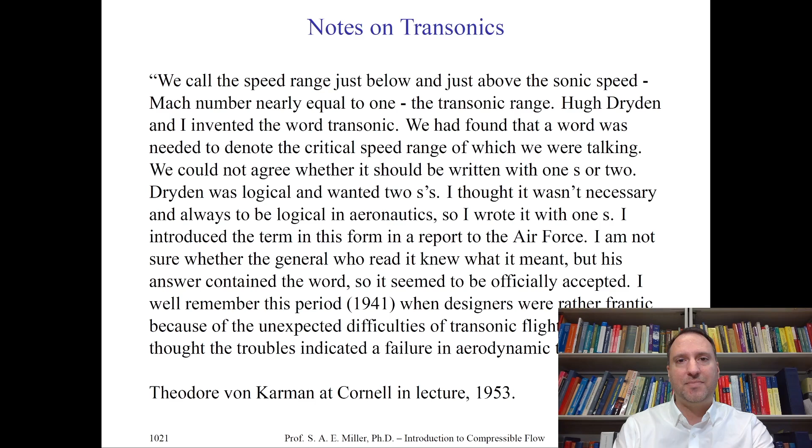Let's start with a fun quote from none other than Dr. Theodor von Karman in his Cornell lecture in 1953. We'll read this together. Dr. Karman wrote and lectured, "We call the speed range just below and just above the sonic speed, Mach number nearly equal to 1, the transonic range."

"Dr. Hugh Dryden and I invented the word transonic. We had found that a word was needed to denote the critical speed range of which we were talking. We could not agree whether it should be written with one or two S's. Dryden was logical and wanted two S's. I thought it wasn't necessary, and always wanted to be logical in aeronautics, so I wrote it with one S."

"I introduced the term in this form in a report to the Air Force. I am not sure whether the general who read it knew what it meant, but his answer contained the word, so it seemed to be officially accepted. I well remember this period, 1941, when designers were rather frantic because of the unexpected difficulties of transonic flight. They thought the troubles indicated a failure in aerodynamic theory."

Indeed, this is where the origin of transonics came from, in a letter to the United States Air Force and its response. The argument, perhaps, between Dryden and Karman was resolved by the acceptance in the community of the new word they coined: transonics. Perhaps it means the transition between subsonic and supersonic flows. This is very important in this time period, of course, because of the advent of supersonic flight and trying to break the so-called sound barrier, to go faster than the speed of sound with a vehicle.

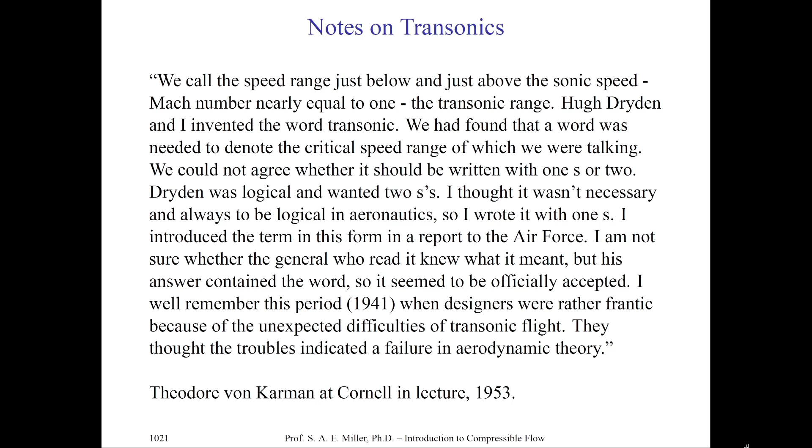Now let's look at some particular notes of transonics. Indeed, transonics might be characterized a few different ways. First, it could be characterized by the so-called drag divergence phenomena. This is where a rapid shift of center of pressure, an unsteady and somewhat unpredictable effect of shock waves on control surfaces, occurs. Indeed, in this class you'll have seen, back in the very beginning, many different Schlieren images of transonic flow and how normal shock waves move around the surface quickly in this transonic regime, making aerodynamic phenomena very difficult to examine and understand.

In this class, we'll also look at the so-called drag divergence phenomena, where the drag rises like a barrier as the vehicle moves towards the speed of sound.

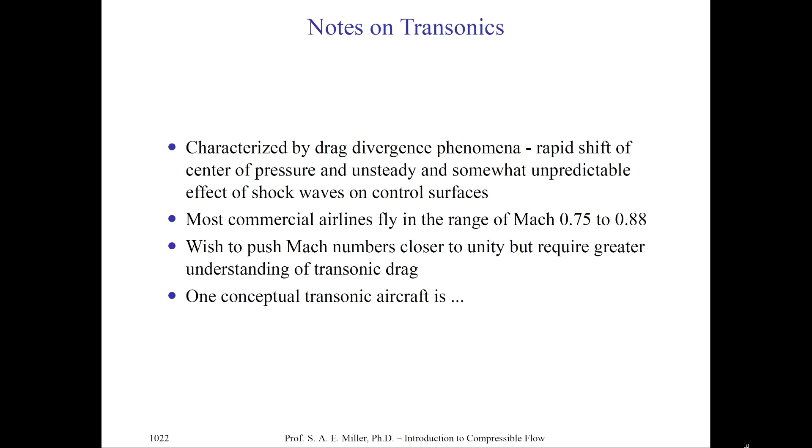Indeed, even today, most commercial airliners fly in the range of Mach 0.75 to 0.88, which is indeed the transonic range, because there are normal shocks forming on the vehicle, as we've shown in previous pictures in this class. Now, we might want to push the Mach numbers closer to unity, but that will require a greater understanding of transonic drag. Perhaps today we are still deriving, showing, and creating test vehicles that operate in the true transonic range, closer to Mach 1, rather than the low transonic speed range, say Mach 0.75 to 0.88.

Here's one perhaps conceptual artwork photo of what might be a transonic aircraft. This is a conceptual photo from the Boeing company. You can see it has canards and very interesting integrated engines with the wings. This whole vehicle is designed to have low drag and fly near Mach 1. The advantage of this type of vehicle is, of course, you can go a little bit faster without much more fuel gain, or loss in this case, as the aircraft might be a little bit faster than contemporary commercial tube and wing aircraft today. It has a unique design.

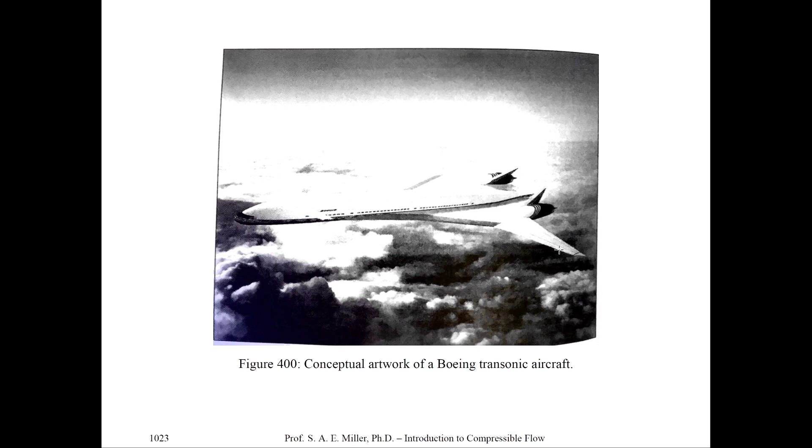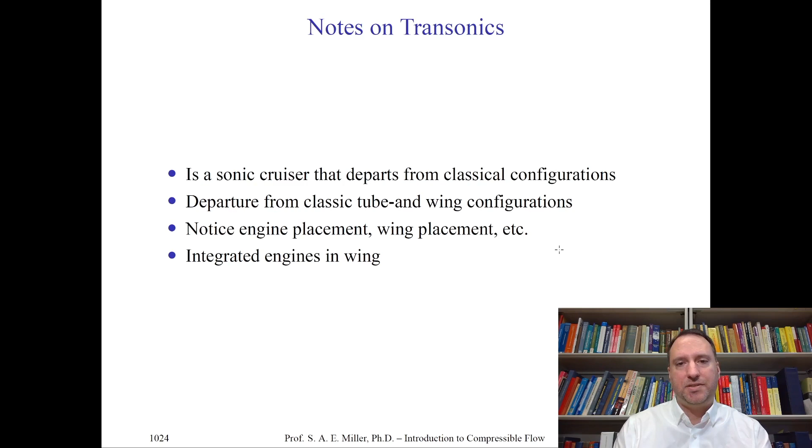Let's consider more about transonic flow. This Boeing aircraft is a so-called sonic cruiser, in that it departs from classical tube and wing configurations. You'll notice the engine placement, wing placement, etc., and the integrated engines on the wing.

Now, if we go back to the 1940s, you'll see that there indeed was a serious lack of aerodynamic data in the literature, wind tunnels, and theory in the transonic range. That's because there are very large changes of all aerodynamic variables near the transonic condition, which change rapidly and cause extreme difficulty in particular measurements. In fact, measuring transonic flow is very difficult because of all the normal shock waves that appear in the tunnels.

According to subsonic and supersonic linear theory of pressure coefficients and their corrections for slender bodies, we might find a pressure coefficient—in equations 663 and 664 of this deck—given by equations of Cp divided by the square root of 1 minus Mach number squared, and Mach number squared minus 1, respectively.

Of course, the Mach numbers just switch so that we have a real value and don't have an imaginary value, e.g. square root of -1 in the denominator. This might be viewed as an off-design parameter, away from, say, the transonic condition. As M infinity approaches 1 from above or below the transonic point, we find a particular singularity, and Cp

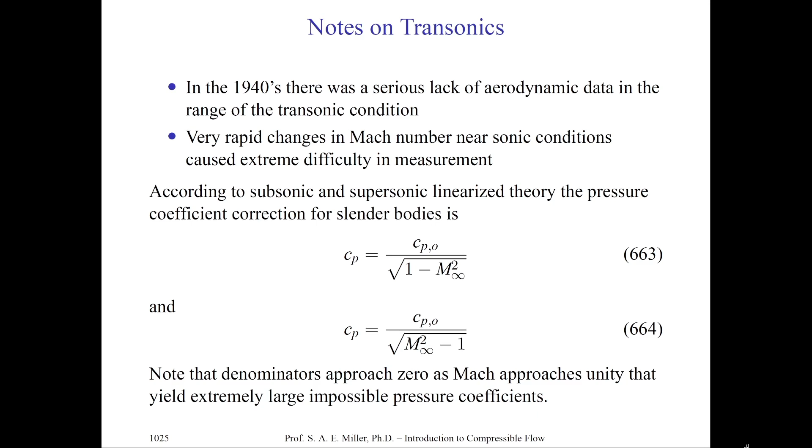blows up according to slender theory. So this theory isn't very useful. You can see that, indeed, as the denominator approaches 0, the Mach number approaches unity, and this creates impossible large values for Cp. But indeed, we do see large value increases of Cp on actual measurements. This is, of course, part of the idea of the rise of drag as we approach the so-called sound barrier. Thus, you can see the transonic regime is extremely sensitive to Mach number.

We can indeed today use the invention of slotted throat wind tunnels, that is, where a test section has holes in it, to help alleviate transonic measurements. If our wind tunnel test section has holes or slots in it, then this helps reduce the reflection of shock waves in the transonic flow. This is obviously very advantageous.

Today, CFD has helped tremendously in predicting transonic flows. It's an essential tool because it's so hard to do the work analytically or experimentally. Also, transonic flow is a challenge to modern engineers even today in the contemporary era, who examine both commercial flight and contemporary fighter aircraft that operate at low and high transonic speeds.

Why might this be? Also, transonic flow is important for space applications during ascent and descent, which all vehicles go through as they go to orbit. So for those interested in space, transonics is an essential subject.

Let's make some basic observations of transonic flow. First, let's make a definition. We'll introduce the critical Mach number, M sub cr. The critical Mach number is the free stream Mach number at which sonic flow is first obtained in a body. Therefore, M equals some subsonic value where transonic flow is first obtained. Thus, in the transonic regime, we could be viewing this as when, with MCR, the critical Mach number is indeed reached.

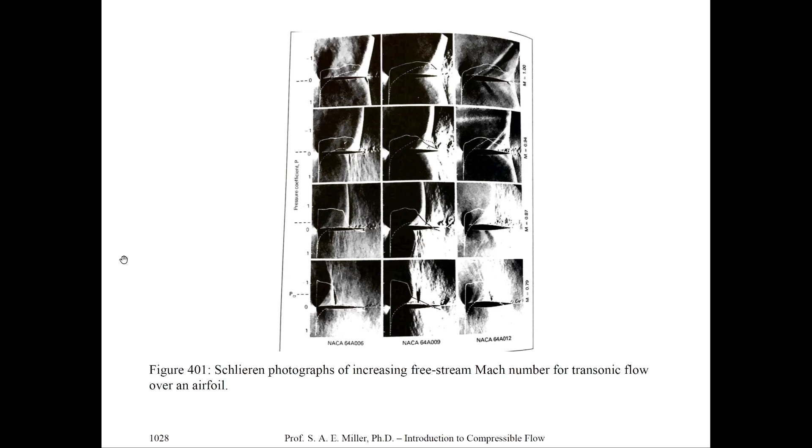We have superimposed a little coefficient of pressure as the white line on all these figures from the original NACA report. Take a few minutes and see how coefficient of pressure changes with the flight Mach number and thickness. What trends do you see?

Let's make some observations about the previous figure. First, you can see that the flow separation is caused by a shock wave boundary layer interaction, where the normal shock wave on the wing interacts with the turbulence and it creates a separation.

That is, the flow separates from the airfoil and recirculation occurs on the airfoil, which is of course not very good for lift. The pressure will increase across the shock wave, which we have learned previously, and it represents a very strong adverse pressure gradient, which helps cause flow separation. We indeed know that regular turbulent boundary layers, which we previously looked at in this class, when a surface has an adverse pressure gradient, might separate.

When a shock wave is near the surface, the boundary layer encounters an adverse pressure gradient and will almost always separate because of the normal shock interaction. The shock boundary layer interactions always cause very large rises in drag, and this could be called the drag divergence phenomena, which is always associated with transonic flow.

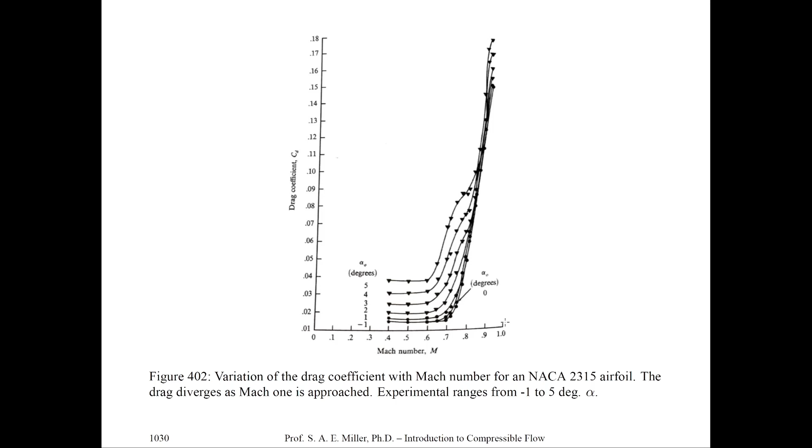Now let's perform some analysis of this flow. We'll do this through the Euler equations. This is an inviscid theory which consists basically of the Navier-Stokes equations with the viscosity set to 0. We'll assume that the flow is inviscid, it's adiabatic, and there are no body forces.

We'll also assume that the flow has large entropy losses and that the flow is rotational according to Crocco's theorem, which we haven't reviewed in this class, but you'll have to take my word for it for now, or you can look it up online.

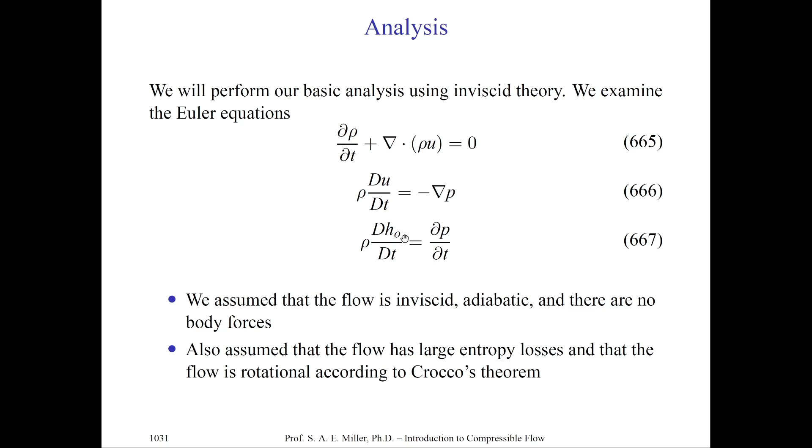The first equation is conservation of mass, the second is momentum, and the third is an energy equation written in terms of total enthalpy. Let's look at this particular flow and analysis.

Indeed, we also must account for entropy changes across the shock. We previously developed this relation. Also recall that Cp equals gamma r over gamma minus 1, which you learned from traditional thermodynamics theory.

Then the entropy across the shock wave might be written as equation 668 in terms of Mach number, because we know the pressure and temperature relations across the shock. This entropy rise across the shock might be written as delta S, the entropy change divided by the gas constant, which goes as two natural logarithms with respect to Mach number and gamma, where m1 is the Mach number in front of a normal shock.

We'll make a substitution. We'll let little m equal m1 squared minus 1. And the term in the second brackets will be equal to, upon substitution in 668, 1 over m plus 1 times the quantity gamma minus 1 over gamma plus 1, times m plus 1.

Now for transonic flows, we know that m1 is approximately 1, and therefore m is much less than 1. Therefore each log term is of the form 1 plus epsilon, where epsilon is much less than 1, because m1 is just above 1. We performed a similar asymptotic analysis when we studied normal shock waves, and we're really doing the same thing here.

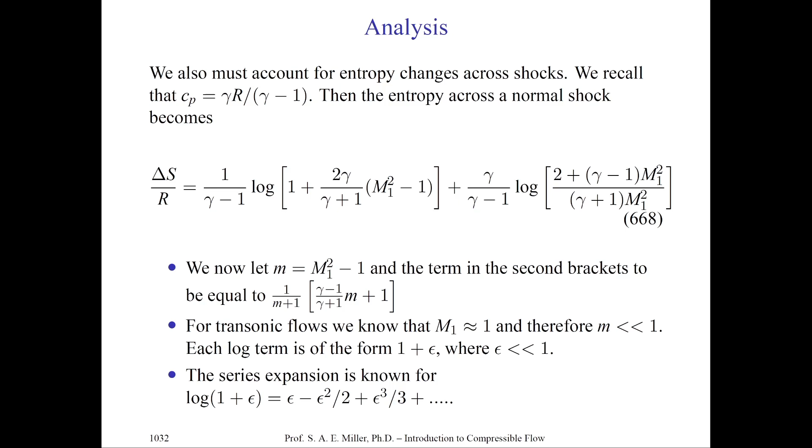We can also note that in our new form, the logarithm of 1 plus epsilon will go as epsilon minus epsilon squared over 2 plus epsilon cubed divided by 3, plus higher order terms. Since epsilon is very, very small, we should expect that log of 1 plus epsilon will go as epsilon. Using these definitions, we can simplify our entire equation 668 of the slide deck into 669 of the slide deck.

We'll have delta S, the entropy after and before the shock, the difference, divided by the gas constant, will go as 2 gamma over 3 times gamma plus 1 squared, times m1 squared minus 1 cubed. Indeed, this will show that the entropy increases across a shock and will be of the third order of m1 squared minus 1, indicated by this cube. This is an obvious analysis.

Then m1 squared minus 1 will be much, much less than 1 because m1 is approximately just above 1, according to our assumed analysis of 1 plus epsilon. Therefore, you can see upon substitution that the entropy increases across the normal shocks attached to a transonic flow of a slender body are very, very small, and so there's very little entropy gain.

The strengths of the shocks will then be given by our previous analysis of delta P over P, the pressure rise across the shock divided by the static pressure in front of the shock. It's proportional to M1 squared minus 1. You can see this from the pressure rise equation with Mach number for standing normal shocks.

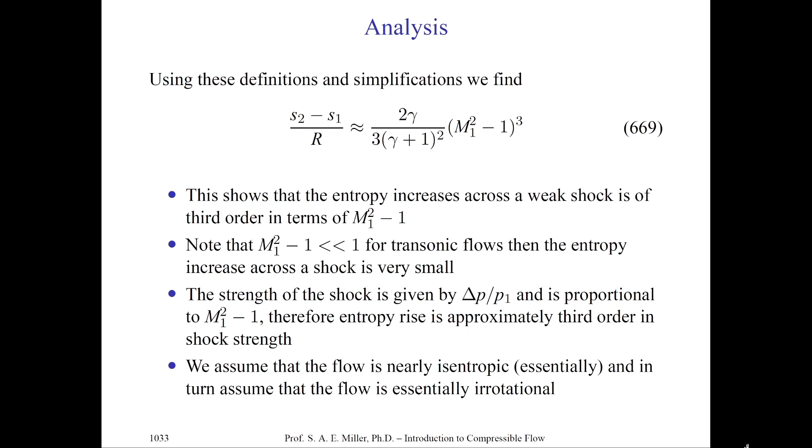We can then, in turn, from this analysis, assume that the flow is essentially irrotational. Not truly irrotational, but essentially.

With the Euler equations and this analysis, we can infer that the velocity potential compressible Euler equations can be written in the form of equation 670. This is a very important equation. Let's look at it: capital Phi is of course the velocity potential, which we can use to recover the velocities of the flow.

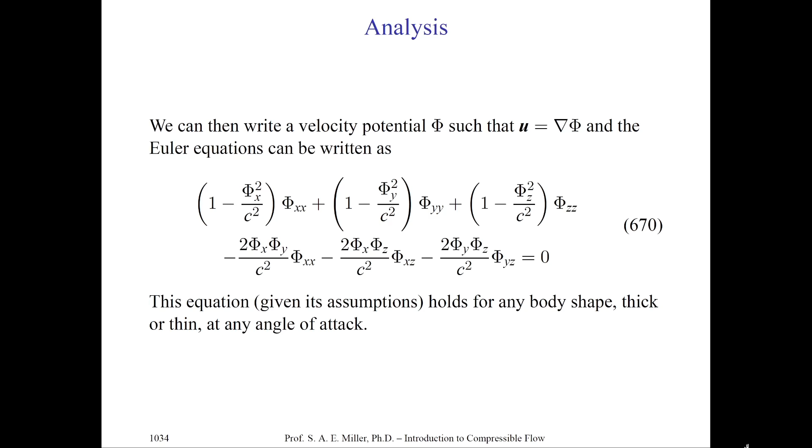Here c is the local speed of sound. The subscripts yy, xx, zz, and mixed derivatives are all partial derivatives acting on phi, first, second order, and mixed respectively. This equation, with our assumptions, should hold for any body, thick or thin, at any particular angle of attack, as long as our assumptions hold true. Of course, this is theoretical and does not account for turbulent flow, which is important.

Now, if we assume that the perturbations of the velocity potential are small, then we can find the so-called perturbation velocity potential equation. Performing a small perturbation analysis will yield equation 671 from equation 670.

You'll see here that we allow capital Phi to be written as a function of, say, capital Phi bar plus phi. So our total velocity potential can be written as an average plus a perturbation. Therefore we have two equations. This equation holds for the perturbation velocity in 3 dimensions. We're only looking at perturbations about the incoming flow capital Phi bar, which is ambient relative to the vehicle. This is the so-called transonic small perturbation equation, a celebrated equation in transonics theory.

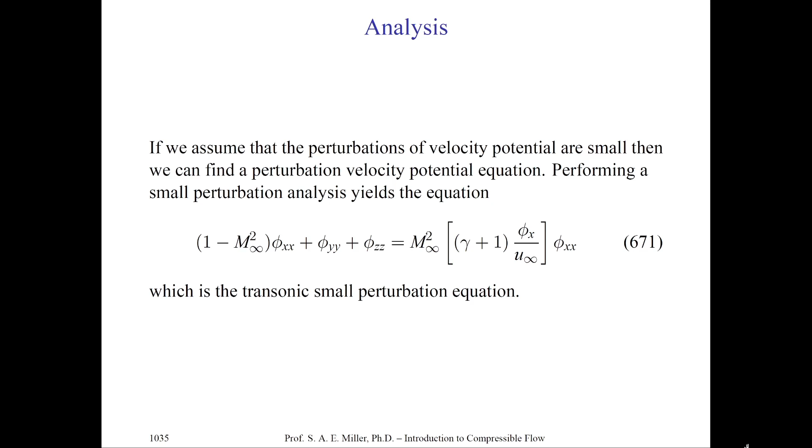We'll non-dimensionalize this equation using a parameter tau, written as b over c. B and c will be defined as the maximum thickness and length scales of the body respectively. Here, c is not the speed of sound, it might be viewed as the chord. B is the maximum thickness, as shown in figure 403 at the bottom of the page. So tau equals b over c.

Simple. Now we'll assume that tau is small, so all our transonic bodies will be slender. We'll transform our coordinates as x over c, y as y tau to the 1/3 over c, which is dimensionally correct, and z bar as z tau to the 1/3 over c.

X, y, and z are our spatial coordinates, non-dimensionalized with respect to the chord or length scale of the vehicle, and its thickness ratio, or so-called slenderness ratio, tau, which goes into the y and z transform. We choose these carefully, and now we're able to define a non-dimensional perturbation velocity potential according to dimensional analysis.

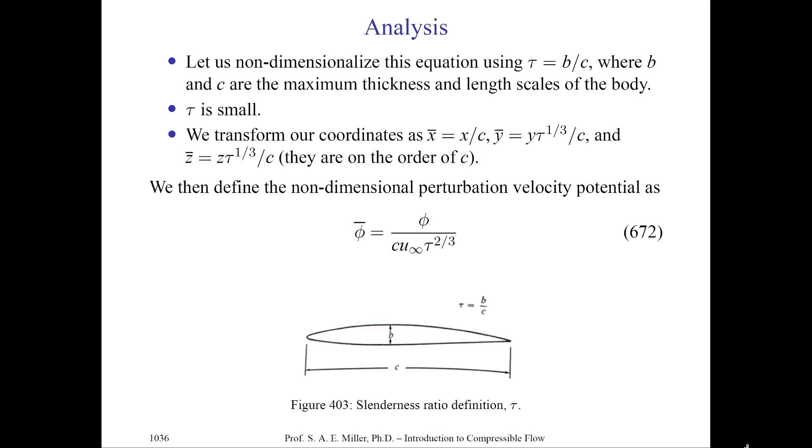We find a non-dimensional perturbation velocity in equation 672, written as phi over c u infinity tau to the 2/3. Therefore we have a non-dimensional perturbation velocity potential equation for slender transonic bodies.

We can substitute our dimensionless forms of x, y, z, tau, and non-dimensional phi into the equation for the slender perturbation. After combining these terms, we find equation 673: 1 minus M infinity squared over tau to the 2/3, minus M infinity squared times gamma plus 1 phi bar sub x, which is partial phi partial x, all times phi bar sub xx bar plus phi bar sub yy bar plus phi bar sub zz bar.

Here, for example, this first phi bar term is the partial derivative of phi bar with respect to x bar, so these are non-dimensionalized partial derivatives. These are the second order partial derivatives in the x, y, and z directions respectively, and it's all equal to 0. It should remind you very much of the Laplace equation, with the first coefficient being non-zero.

M sub infinity is the global Mach number, which we reviewed at the beginning of this class, the Mach number of the vehicle traveling through the atmosphere. And tau is the slenderness ratio, which is only dependent on the vehicle itself.

So look at equation 673, and what do you see if you perform this analysis for the first time? You see this first parameter here. We'll call that 1 minus M-infinity squared over tau to the 2/3 K, capital K. This is what we defined in transonic theory as the transonic similarity parameter. It's a non-dimensional number, just like Reynolds number, Prandtl number, Rayleigh number, or any of the other multitude of non-dimensional numbers important in aerodynamic theory. The transonic similarity theory parameter is K.

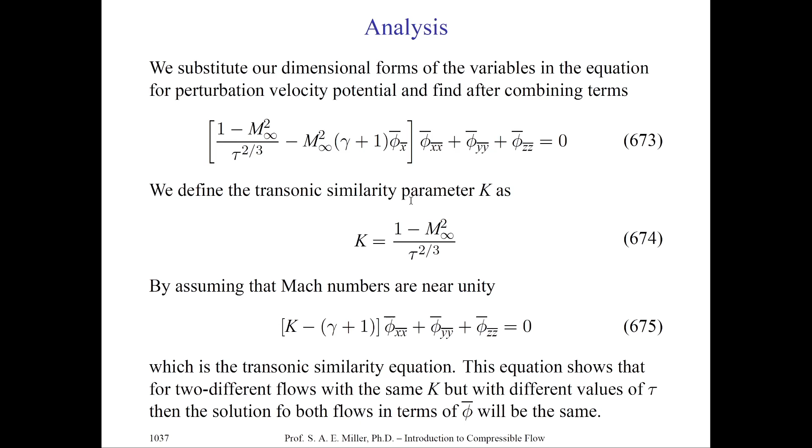So the most important parameter to match between a transonic flow in a wind tunnel and the flight vehicle in the actual atmosphere is K, and we derive this from similarity theory. Indeed, this is what has driven transonic wind tunnel tests for actual flight vehicle testing for decades, and was a major discovery. Without this discovery, I think we would not have made this particular flight vehicle successful.

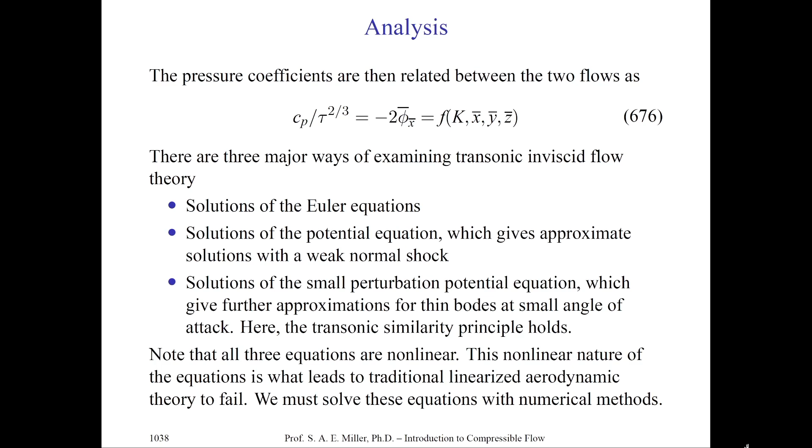We can then find the most important parameter, which is the coefficient of pressure. The coefficient of pressure, Cp, can be divided by the slenderness ratio to the 2/3 power, and that will go as negative 2 partial phi bar partial x bar, which is only a function of K, x bar, y bar, and z bar. So there are three major ways of examining transonic inviscid flow theory.

The first is through the Euler equations, or Navier-Stokes equations, through CFD. The second is the solution of the potential equations, which gives approximate weak solutions of the normal shocks, which we showed in this class. And finally, the solution of the small perturbation equation, which gives further approximations for thin bodies at small angles. This is where we found the transonic similarity principle through the dimensionless number K.

We'll note that all these equations are nonlinear, and this nonlinear nature is what leads traditional linearized aerodynamic theory to fail, which you learned in your undergraduate and previous classes. This is why the simple potential flow theories do not work, because they're linear, and the equations which govern transonic flow are nonlinear, which give rise to the so-called sound or drag barrier, which we saw in traditional media.

Indeed, we must solve all these equations with numerical methods, but it does give our experimentalists a wonderful tool of knowing about the transonic similarity parameter.

Let's look at some particular historic viewpoints of transonic flow. Chuck Yeager was the first pilot of the XS-1, which obtained a Mach number of 1.06 in his first flight. This was indeed the first aircraft to break the so-called speed barrier and fly faster than the speed of sound at sea level.

Indeed, there were earlier aircraft that broke the sound barrier, in transonic dives, especially in World War II. Unfortunately, these aircraft often broke up in flight because they didn't have the structural rigidity and strength to survive the transonic regime and its huge rise in drag. The success of the Bell XS-1 was followed by 30 years of intense research in transonic flight from the 1950s, and it's still happening today.

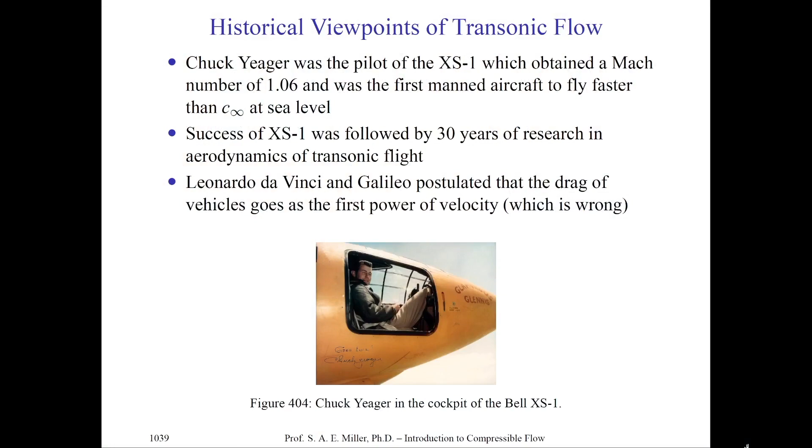So the early aerodynamic tests were actually on machine gun bullets of 50 caliber. And this is why if you look at the front end of the Bell XS-1, it looks very much like a 50 caliber bullet. Take a second and look at the fuselage on the right in the nose. Indeed, that has almost the exact same contour shape as a 50 caliber bullet. And this is based on the early German studies.

This, of course, helps find the first curve of transonic drag rise in their famous graph of CD versus U. They showed that the drag actually decreases after Mach 1, which is absolutely significant and strange. And so there's a huge drag around Mach 1, which was shown through the traditional CD equations that are normalized, of course, with the square root of m infinity squared minus 1 in the denominator.

Later, in the United States, at the Army Engineering Division, McCook Field near Dayton, Ohio, two people named Caldwell and Fales, now the Air Force Research Lab at Wright-Patterson Air Force Base, conducted a series of experiments on airfoils for the purpose of studying propeller blades. And these, of course, were residing in the transonic regime. They conducted the first wind tunnel tests involving high-speed flow over stationary airfoils.

And they show how large drag increases in lift near, of course, the transonic range, and then decreases lift tremendously in the transonic range. This means that there's a total loss of lift as, of course, we approach the sound barrier of the vehicle, which causes it, of course, to fall out of the sky. And we needed better designs to overcome the transonic regime. They indeed further measured the compressibility effects on an airfoil, which they called the critical speed.

Not soon after, Hugh Dryden, and of course Dryden Research Center in California of NASA and NACA was named after him at Dryden Field today. Today it's renamed Armstrong Research Center. And his collaborators performed experiments published in the NACA called Report Number 207, which you can see for yourself on NASA Technical Report Server. Go ahead and download it and check it out.

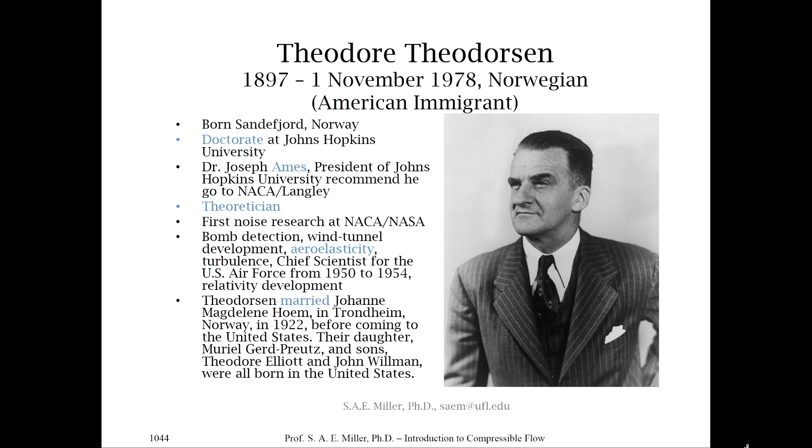Now, these early models were inserted in the transonic flows, which choked the tunnels, and research was unable to be conducted. Recall our discussion of supersonic wind tunnels: the cross-sectional area of the test section is smaller when you insert a model, and therefore it rechokes the flow, and studies are therefore impossible to conduct, especially at transonic speeds.

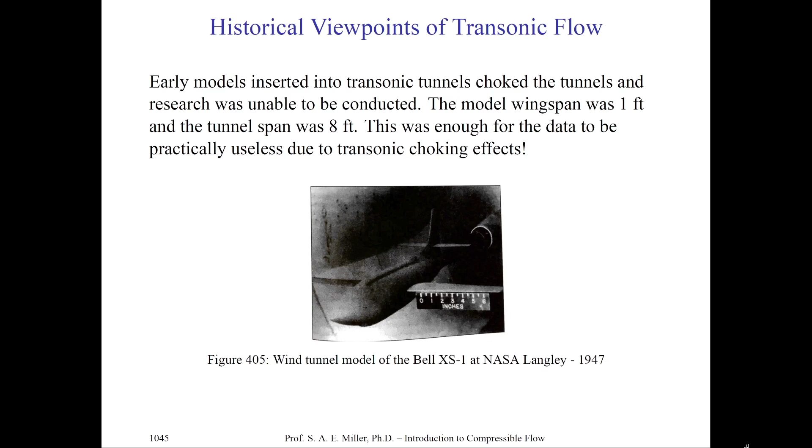How could this be overcome without changing the tunnel? It can't. So we actually altered the tunnel, not the model, to try and find supersonic and transonic experiments of these vehicles. Here's a more contemporary picture of a transonic test section.

This is a slotted test section of the Florida State University Polysonic Wind Tunnel. I took this picture in 2018 with my cell phone camera, which you can actually see in the glare of the tunnel. But you can see there's these long slots. So we're looking down the test section, which is removed from the tunnel, seen in the background.

Basically, these slots reduce the reflections of the shockwaves in the tunnel and overcome the area changes which occur when we block the tunnel with a particular small device. These slotted tunnels, and perhaps perforated tunnel walls, were a key development in the United States and were a Cold War secret for many decades, kept from the Soviet Union.

Now, in 1946, a fellow named Ray Wright, a theoretician at the NACA Langley Research Center in Hampton, Virginia, argued that a test section with long, thick rectangular slots parallel to the flow with an approximate 12% open area would reduce the blockage problem for transonic flows without any negative effects.

He was essentially saying to drill holes in the side of their precious, world-renowned wind tunnels. A fellow named John Stack, who was the administrator of NASA Langley, approved slotting the 16-foot high-speed wind tunnel of Langley based on a simple paper by the junior engineer Ray Wright.

This must have been horrible to many of the senior administrators and senior personnel because, of course, you were going into a wind tunnel and essentially drilling holes in the side of it. It was a ludicrous idea at the time, but it was backed up by the theory and mathematics of Ray Wright. This is a wonderful example of the power of theoreticians.

Indeed, the slotting throat concept, used today in all transonic wind tunnels, helps smooth the transition through Mach 1 and removes the problem of blockage, therefore allowing the first functional transonic wind tunnels to be used for testing transonic and supersonic flow at NASA Langley Research Center. This remained a state secret for decades.

Indeed, there was no theoretical, analytical, or numerical method useful for transonic calculations until the 1970s, when CFD methods from, say, Murman and Cole came into use. We will talk about these particular CFD calculations of Murman and Cole in our next lecture on transonic flow.